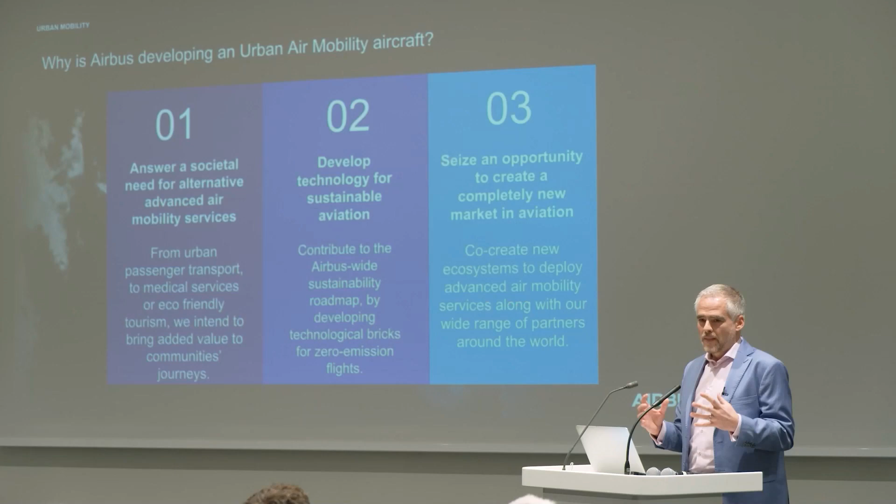There's also other missions that we can do, ranging from medical missions, not exactly a helicopter emergency medical mission, but transporting doctors, for example, to an accident site, between hospitals, elements like that. It can also be for eco-friendly tourism, so flying over specific monuments without creating too much pollution, visually and sound-wise.

So there's a lot of aspects where urban air mobility, or eVTOLs in general, will find their market. The second pillar, and that's very, very important especially for a company like Airbus, is that we are talking about electric flight. We are a precursor for everything related to local zero-emission flight. And we're developing the technologies necessary for that at a scale that's kind of a four-seater size, a scale that's relatively manageable in terms of technology.

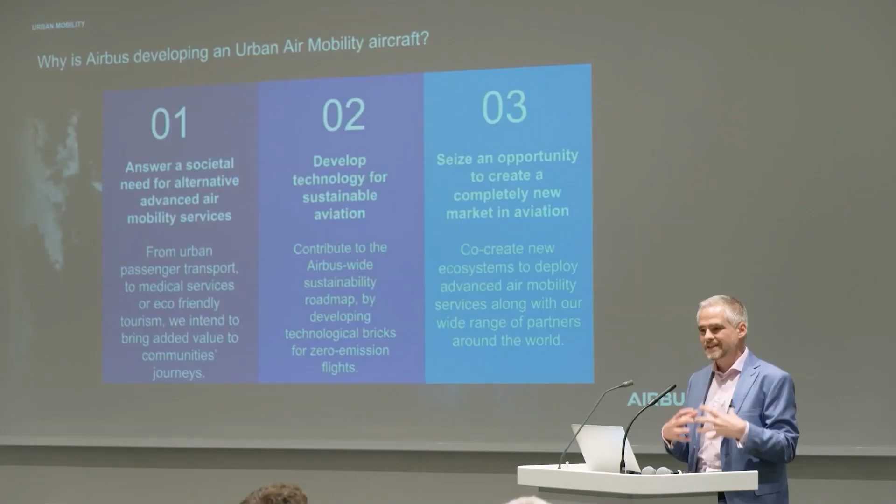It's about the order of magnitude of energy and power that you need here, like in a high performance electrical car. It's not yet the megawatts and so on that you will need in the future. So it's a good step towards electrical flight also at greater scale. And therefore, the investment that we are doing here is building not only the knowledge in the brains, but also the technology bricks for the product range of such a diverse company as Airbus.

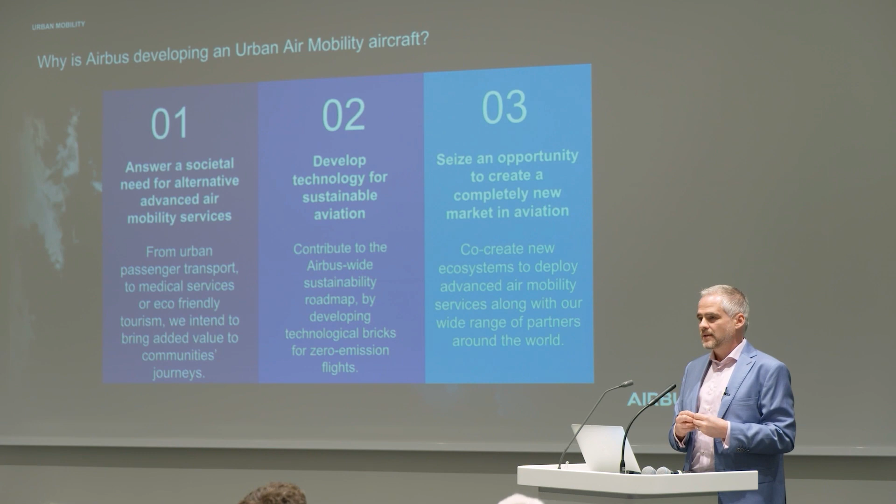And obviously, such a new means of transport is a business opportunity. So it's a way for us to develop a future business line that can capture this new market and therefore also contribute to the prosperity of the group in the long run. So many important elements that make us invest into urban air mobility.

Now let me start a bit on the technology side.

It's not really all about technology, but the question always comes up: why are we talking about urban air mobility now? Why not 30 years ago? Because 30 years ago helicopters existed, you could have taken off and landed vertically in cities and so on. So why now?

The main reason is the advancement of electrical propulsion technology, battery, energy storage, etc., that allow you now to build a vehicle that is relatively silent, economic, zero local emission, and that brings a solution that's economically viable and gets more competitive compared to ground transport.

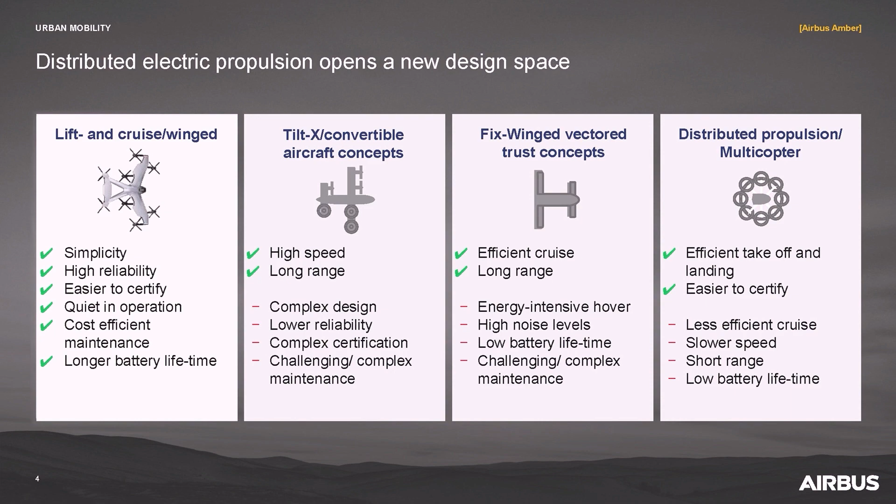Then you have different versions in between that allow you to adapt, go faster, go further, be simpler, be cheaper. Out of this whole new design space, the whole industry is now thinking about what's the right configuration, what's the right solution.

We just had it today: there's about 700 different concepts out there in the industry now, 700 different projects trying to explore this space.

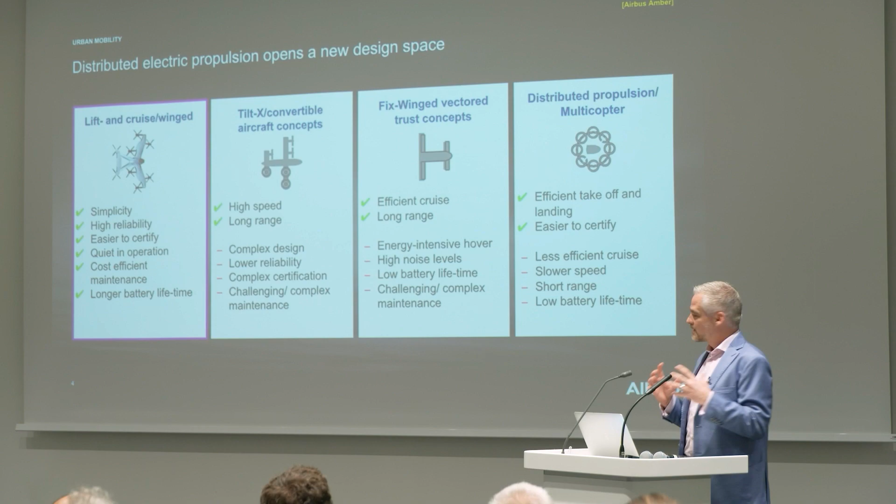I think it's just realistic to say that nobody really has the answer of what these eVTOLs will really look like, but we are all taking our knowledge, the industry and ourselves, and trying to project into the future with our knowledge and what will be the right eVTOL architecture. I'll come to that now.

We are not reaching yet the performance in terms of range and speed that we would expect, but you can see that we are mastering such a configuration already today.

What you have here is our very first generation of eVTOL, basically a kind of drone at the scale of a passenger transport system. It's been designed with the idea of starting with the simplest possible configuration, so multi-rotors. There's not much on it except for control, except the RPM control.

Then you have a cabin that is already designed for easy access, egress, great visibility, to a certain level of comfort already. It doesn't have a real cabin yet, but the shape and form is built so that it's in there. We've taken into account the safety aspects that we knew about in 2015-16 when we started this project. Since then, a lot of things have evolved, and our knowledge has evolved very strongly.

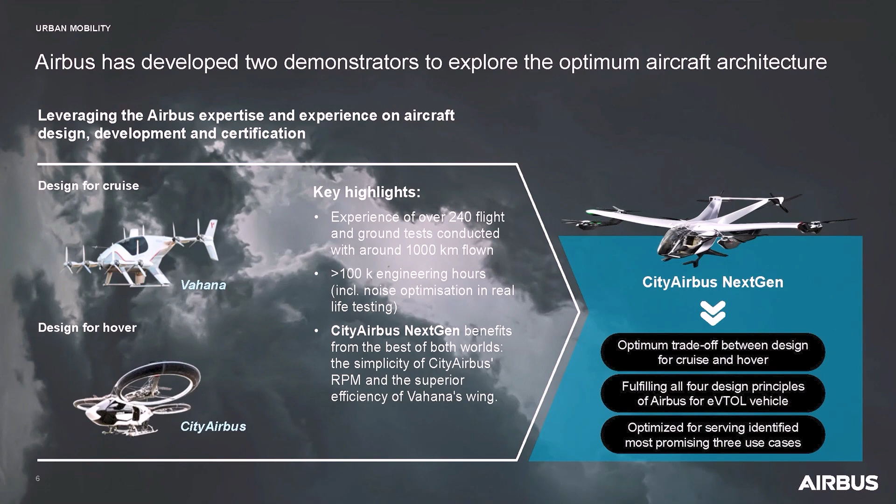So this one is a vehicle with dual tilt wing. It has also 8 propellers. The wings, or the aerodynamic configuration, change from vertical takeoff, tilting forward to horizontal flight, so it's very efficient in horizontal flight.

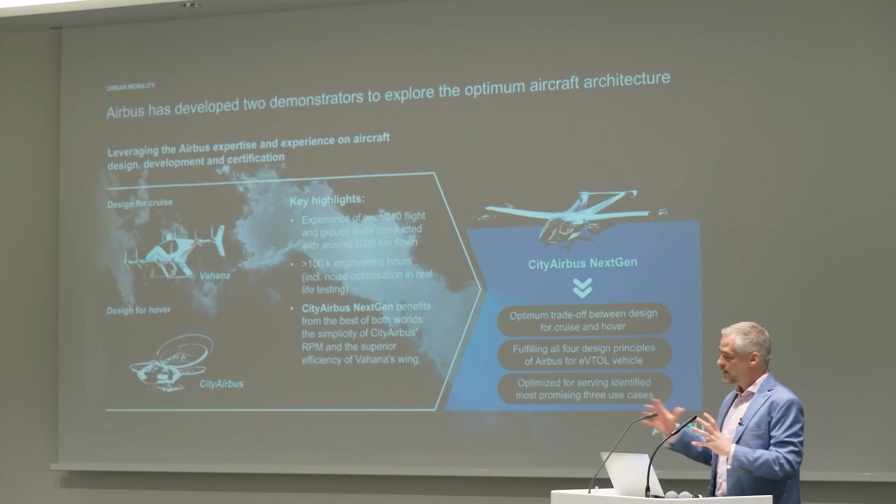But it requires, for example, variable pitch control of all the propellers, tilting mechanisms that are safety critical, so not easy to certify at the end. So a certain level of complexity with flight control, with control surfaces for forward flight and so on. It has been designed for an equivalent of about 1 passenger.

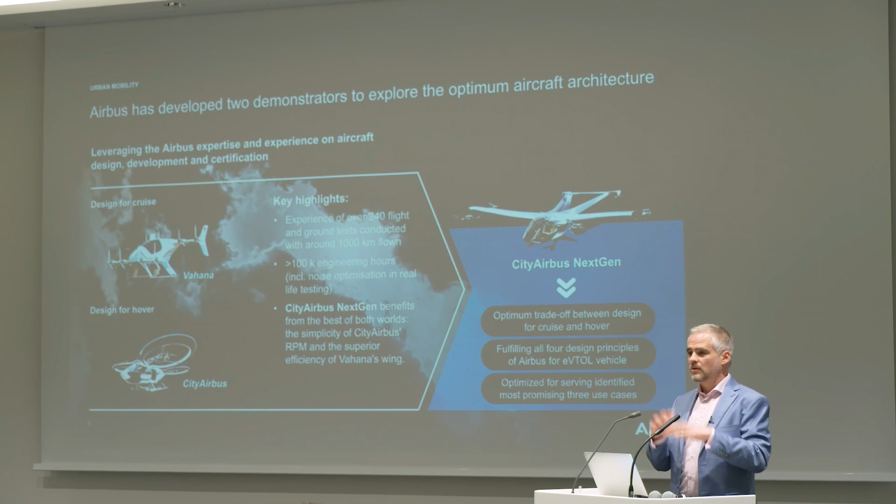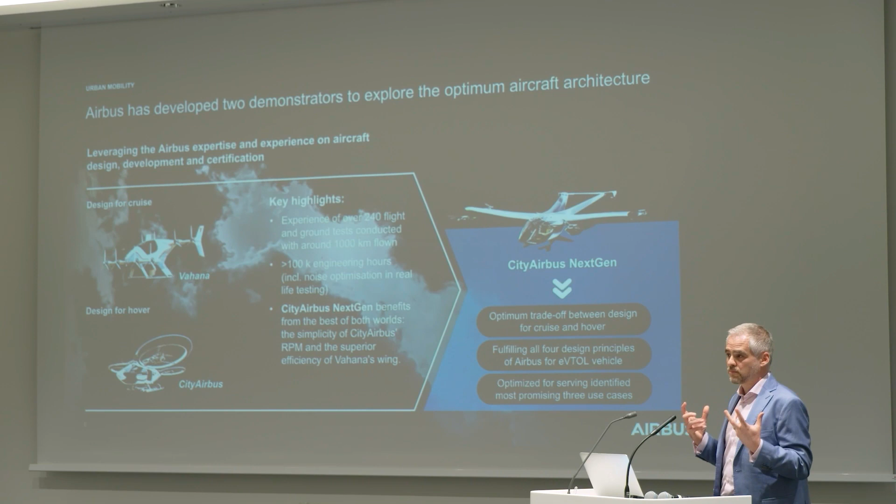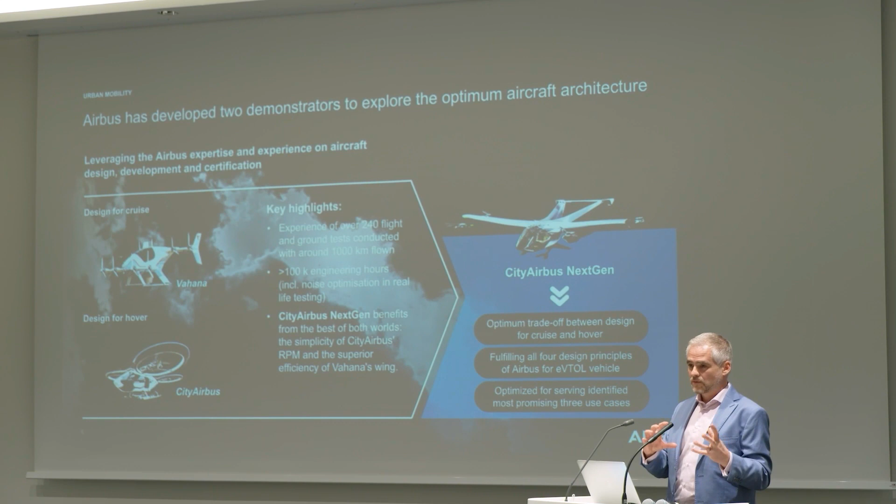I've seen this flight as well, and it flew at the end - it flew 50 kilometers at about 100 knots, and that's a pretty impressive mission. When you see and hear it, it was almost inaudible because in forward flight it was in this wing-borne configuration. So that experience gave us a lot of data on top of what I've described about the CityAirbus before.

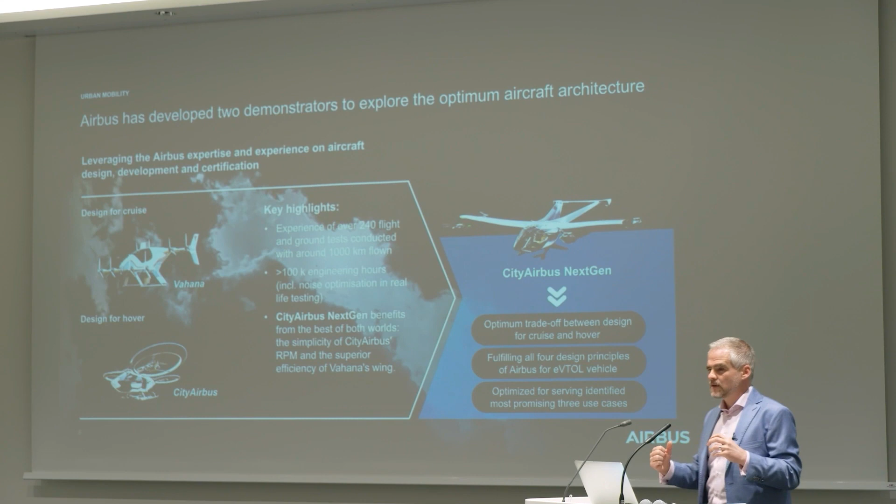And based on that data, we have designed a new generation. We call it, very creatively, CityAirbus NextGen, which you can see on the right. It's building on the bricks of having a wing.

It's still trying to minimize the complexity of the vehicle in terms of transition and so on. It still has no moving surfaces, and it's still only controlled by RPM control. Because of the shape or configuration of the propellers, it's a bit difficult to see on this black screen.

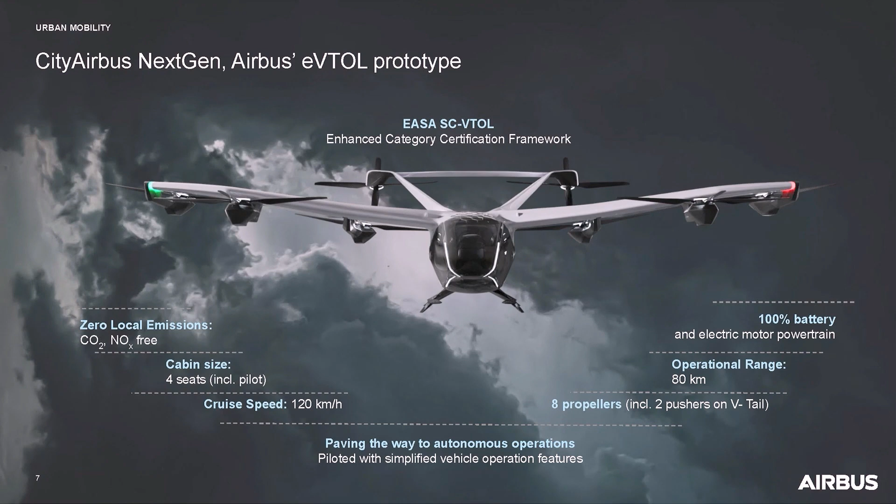But you have 6 lifting propellers on the, let me just take the next slide, you see it perhaps a bit better. You have 6 lifting propellers on the wing, and you have 2 lift-push propellers at the back, so it takes off like a multicopter, basically, like the first generation of CityAirbus.

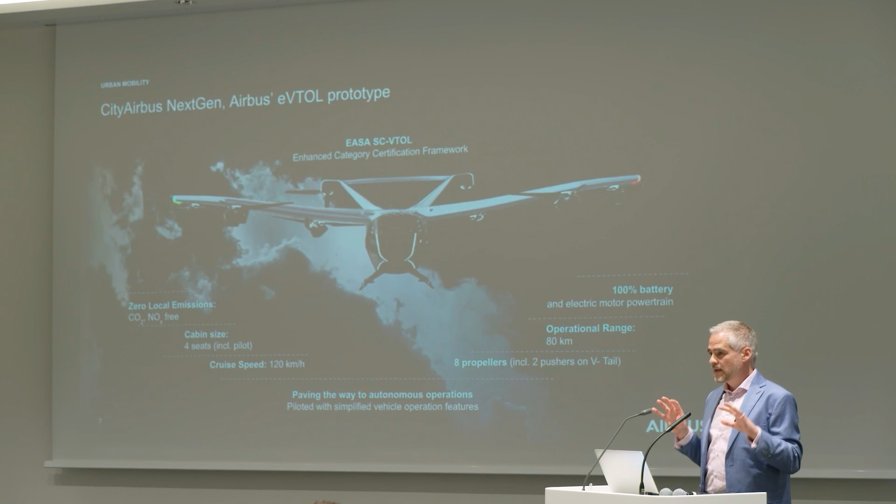And then it slightly tilts forward, and the 2 rotors at the tail will create forward thrust as well as a part of the lift, so it transitions into forward flight. Nothing changes, nothing tilts or moves. It's basically only the attitude of the aircraft moving into forward flight and getting back out of it again. With this architecture, we think we can build a real certifiable product. That's our target, our vision.

That is a 4-seater. At the beginning there will be 1 pilot plus 3 seats for passengers. That's the initial aim. It will fly about 120 kilometers an hour at a range of about 80 kilometers. It will be almost inaudible, especially in cruise flight.

When you're in an urban area with some ambient noise, you will probably not be able to hear it. At takeoff and landing, yes, it will create a bit more noise. That's normal - the sound emissions are more important there because we are really in the totally propeller or rotor-based lift part of the flight envelope. But still, with that configuration, we think we can stay below what we usually have in the industry.

The whole vehicle will be certified by EASA, along the EASA special condition VTOL, and I'll talk quite a lot about it in the second part of the presentation. This is kind of the European approach to it. FAA has rules as well, of course, for certifying this aircraft.

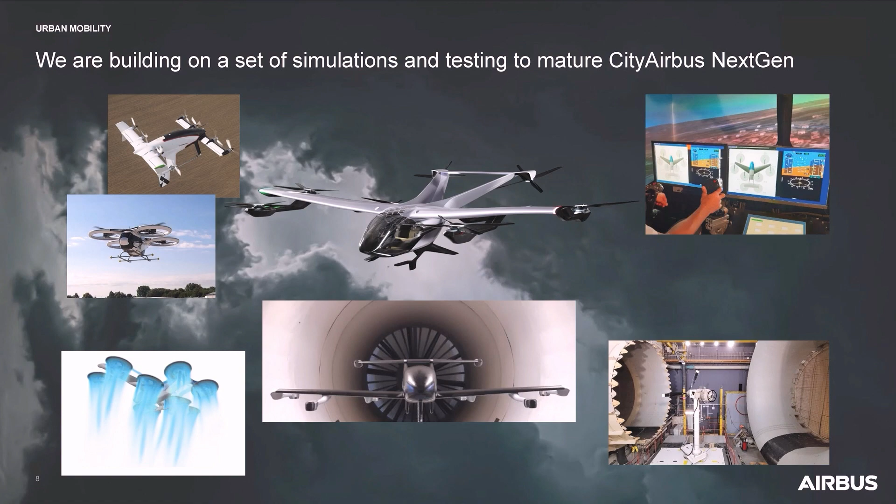Now, where are we standing at the moment? In order to come to this configuration, we've done quite a lot of studies and analyses. I've talked about the 2 vehicles that we have even flown, but there have also been a lot of simulations and calculations, especially in terms of aerodynamics and aeromechanics.

Last time I asked them, they had about 31 million CPU hours consumed for the aerodynamics calculation - that's already a while ago, so probably they are at 50 million now. An enormous amount of calculation, because the configuration in itself is relatively complex aerodynamically speaking.

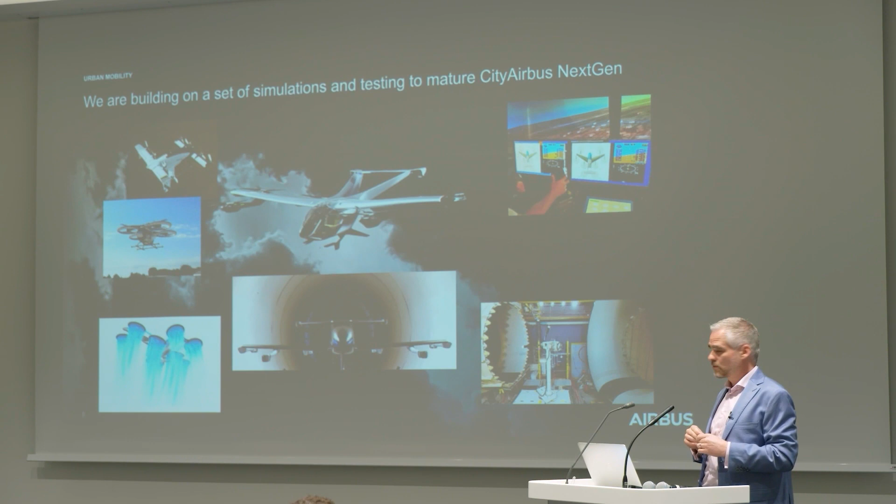You have the basic lifting surfaces, the wing, the fuselage, but then you have 8 propellers that change thrust dynamically, and you have to analyze all the interactions and couplings between the different areas of the flow field. So it's quite a lot of work to predict such aerodynamic behavior of the vehicle.

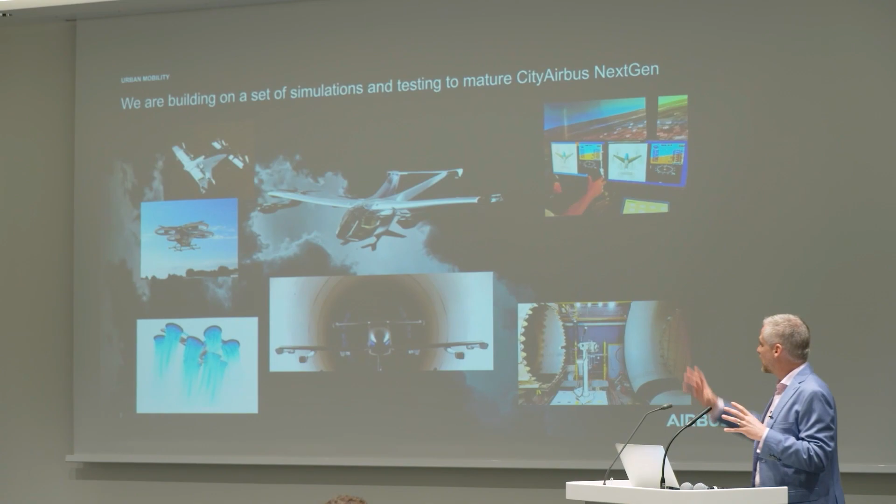That's why we have also done wind tunnel tests, of course, in a clean configuration without propellers, but also with propellers with motors on them, so that they are really turning and creating lift, to calculate and measure all the aeromechanic coefficients that we are having.

We have built a full-scale propeller that we've put in the wind tunnel and measured it also through the full future flight envelope, because that's not trivial either. You have kind of edgewise flow in this vehicle, so the propellers will stay horizontally during forward flight.

They will continue to turn. Some other propellers are at a slight angle that create the forward thrust and the lift. So this whole behavior of such a rotor has been analyzed, and on top of that, we have also measured the sound emission and optimized the design.

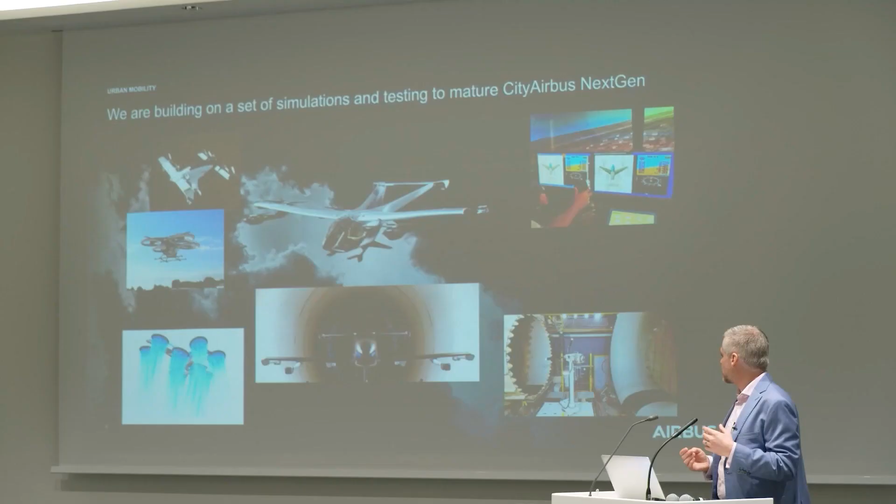Here you can see at the bottom right a 3-blade propeller. But there are other designs that we have checked - we had 9 propeller architectures that we measured and optimized in that sense. And that's very important. On the top right, and I'll go to that a little bit later in the talk, that's the flight control simulation.

So that's in our flight control center in Marignane, where you have a pilot already in the loop who is flying this vehicle and developing the man-machine interface. How will this flight be steered? You will not control the attitude of the vehicle, but you will control the trajectory. You tell the vehicle what it's supposed to do. You don't say nose down, bank angle, or something like that. So that's a very different concept in terms of controlling the vehicle. And of course, this is a fully electronic flight control system, so the flight control laws play a fundamental role in the stability of this vehicle.

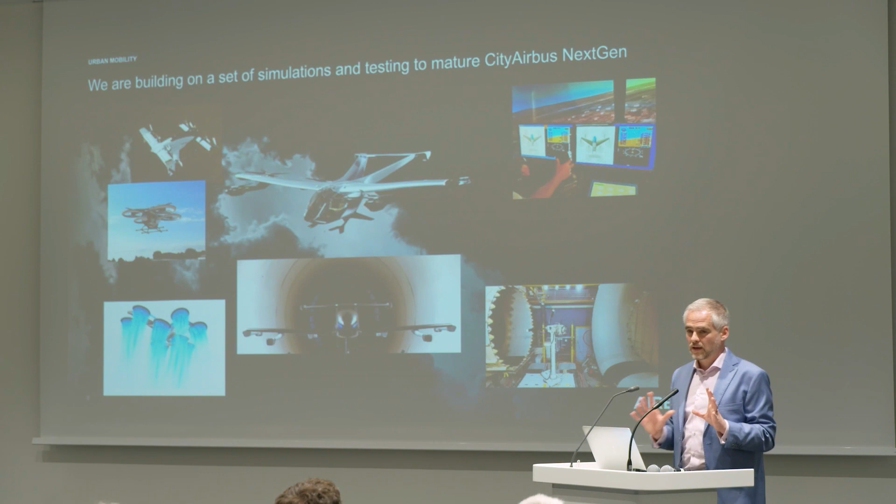So this is just to give a bit of an overview of the work that has flown into this design already. And this cannot be done alone, even for a big company. This is a broad approach with a lot of very strong partners.

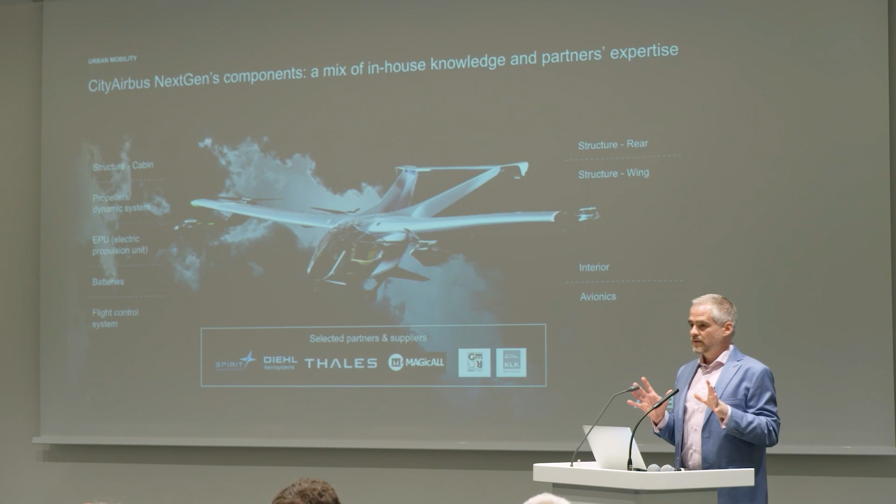So obviously there's everything around structure, and we source quite a lot of components from outside. We have Spirit in Belfast, for example, for the wing. They are specialized in wing design, let's say in a smaller scale than what you would have on an Airbus wing, but exactly what we need.

We use Thales and Diehl Aerosystems for the flight control system. It is a dissimilar, redundant flight control system with 2 different types of flight controllers, a primary one or 3 primary ones and a secondary one, that can ensure that we have dissimilarity and redundancy during the whole flight.

We are using the US company MagicAll for the motors. They have a strong competence in eVTOLs already. We used them already for the Vahana before, and on drones. So they are industrializing electrical motors for these kind of applications already today.

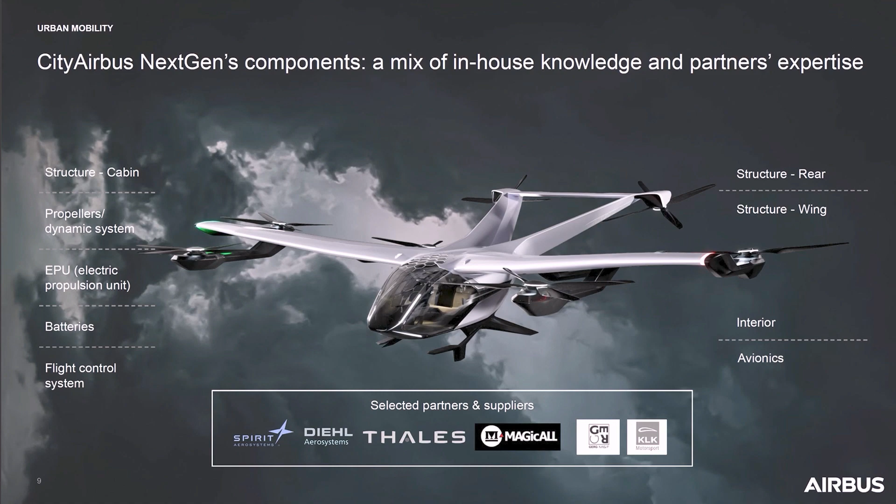We're using 2 smaller companies that are more like from the high-performance sports car part, that are doing, for example, the rear structure there. They are doing the design and the manufacturing with also principle, and that's interesting for us, that they get from the automotive industry, in this case from the Formula 1 racing industry. So we are trying to get different types of companies with different approaches and new ideas into our system, ranging from large, well-known companies to also smaller ones that can bring a different approach, so that we learn as much as we can out of this prototype phase that we are currently in.

So this vehicle will be flying in... so this vehicle, the components are currently in the detailed design phase. We're going through that process. The components will come next year. We'll assemble them and then test fly the vehicle, and take the amount of time it takes to fully understand this configuration and the technology of the different systems and the architecture in itself.

Perhaps one thing I missed to say is that we are using batteries. That's another fundamental part. We are building them in-house, that's why you don't see it on the slide. We're building them in our Airbus Defence and Space site in Toulouse, where they already did batteries for previous vehicles, and also for space applications, launches, satellites and things like that. And they have a strong capability of developing batteries.

And there will be other things that will need to come, like interiors, for example, and we need strong support for that, of course. So that's about where we're standing on the vehicle.

The vehicle itself is obviously one thing, but I wanted to show a second video, which is just about the test house, because we've done it a few days or weeks ago. We have inaugurated the test house, and there was supposed to be a video that doesn't show, but in principle, a lot of things need to happen in parallel: the technical development, the whole testing concept, to ensure that what we are doing here is really sound and safe.

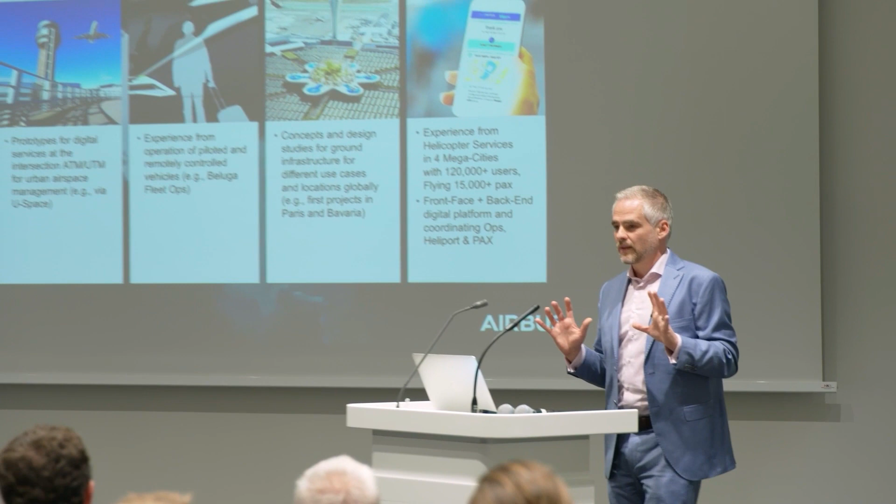And that brings me as well to the ecosystem view, and that's the second very important part. Yes, the technology is important. We are getting there now with the maturity of propulsion technology, etc. But such a vehicle will not be very effective if you do not integrate it into a transport system. So obviously, maintenance, operations, and so on, we know that from our industry.

We also know that you need infrastructure. And today you have large infrastructure, airports, basically for air transport that you need. But if we want to deliver a meaningful service, then we also need to have infrastructure there where the passenger wants to go, or close to the final destination of the passengers.

And that's not trivial, especially in European cities where you have very densely populated cities that have not much space for these kind of things. And it only makes sense if you fly to some place, if you then have to take a cab for another 20 minutes to get to your final destination, you basically lose the advantage that you get from flying in the first place. So infrastructure at strategic locations is key, and this infrastructure needs to be well utilized and profitable, so that it makes sense as an investment case. That's an important enabler for air mobility.

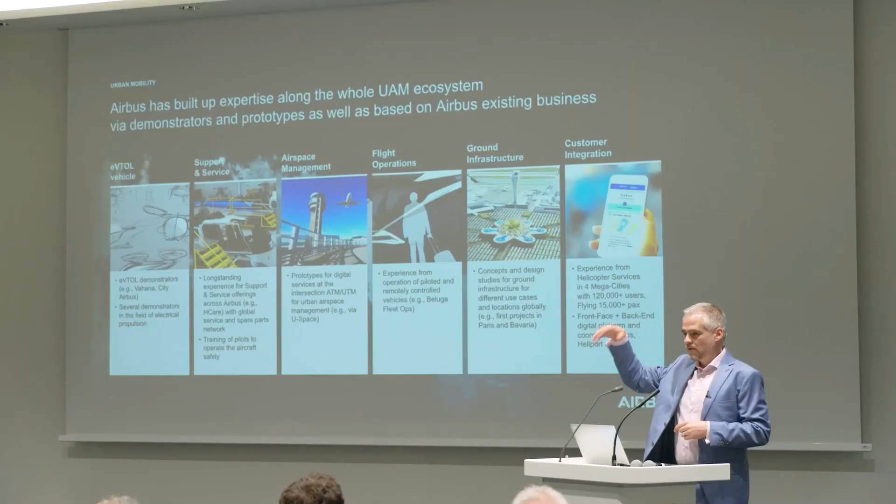Air traffic management is another very important point. You need to operate these vehicles ultimately in non-segregated airspace, together with all other participants in flight. You'll have helicopter missions, emergency medical service missions, drones, flying taxis around airports and over cities, and obviously the commercial flights. All these things need to work together. So the whole air traffic management part is fundamental to make this efficient and safe.

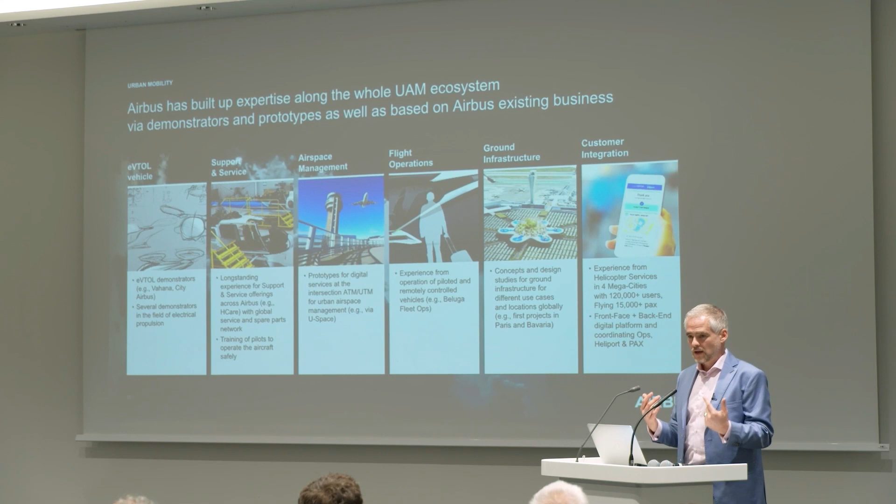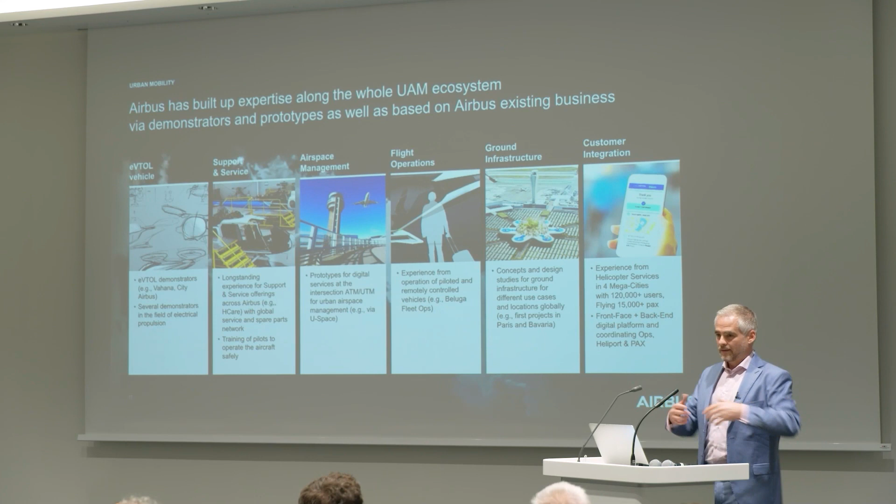And you need to deliver that service to a final customer. So you need to provide an integrated mobility experience that allows him to say, okay, whatever his constraints are - speed, budget, reliability, comfort, perhaps the pleasure of flying and seeing a city from above - you give him a tailored mission, a tailored solution comprised of a flying part, but perhaps also a ground transport part, an improved pickup at the airport, or a security clearance that makes it efficient. And you need to provide that to passengers in an optimized, connected, electronic way.

For that, I wanted to explain shortly that before the pandemic we actually operated a service called VOOM, using helicopters. We started operations in Sao Paulo, Brazil, but also in Mexico City, and eventually even in the San Francisco Bay Area. There you could book a flight with a button basically, with the app that we had. We had about 120,000 users registered on the website, and about 15,000 passengers that we transported. Out of that, we also got quite a lot of experience.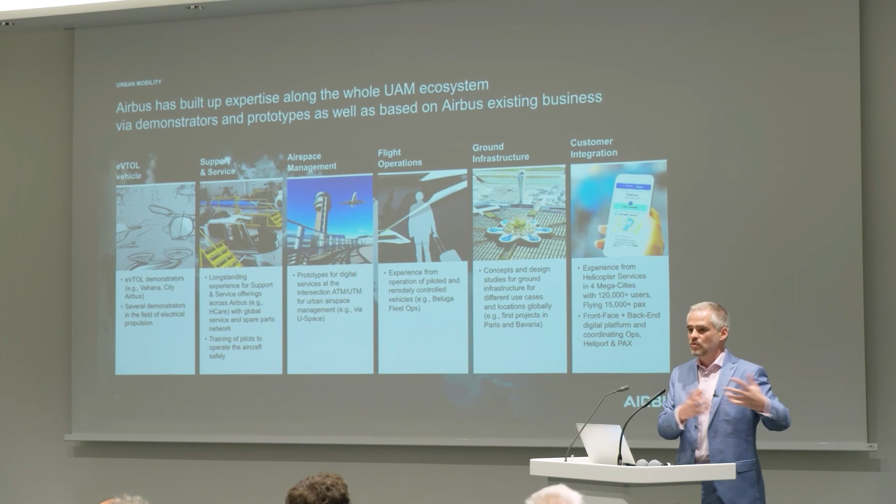We learned about luggage or expectations - what does somebody who wants to go to the airport take with him, what kind of profiles or travelers do we attract most, and things like that. That gives us quite a good view of what this market will most probably develop towards, which is important for the design and performance requirements you specify for such a vehicle. But again, all this is a projection now. This whole market needs to develop and materialize, and then we can talk again in 10 years and see how the predictions work and how things actually develop.

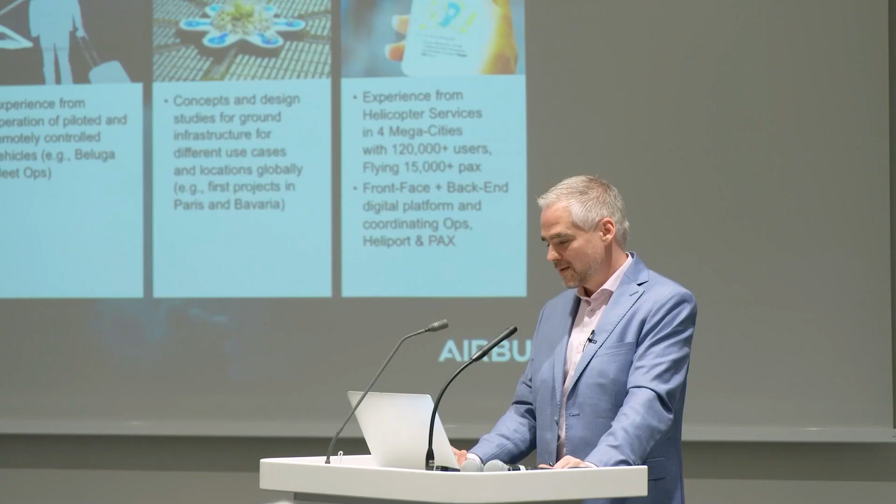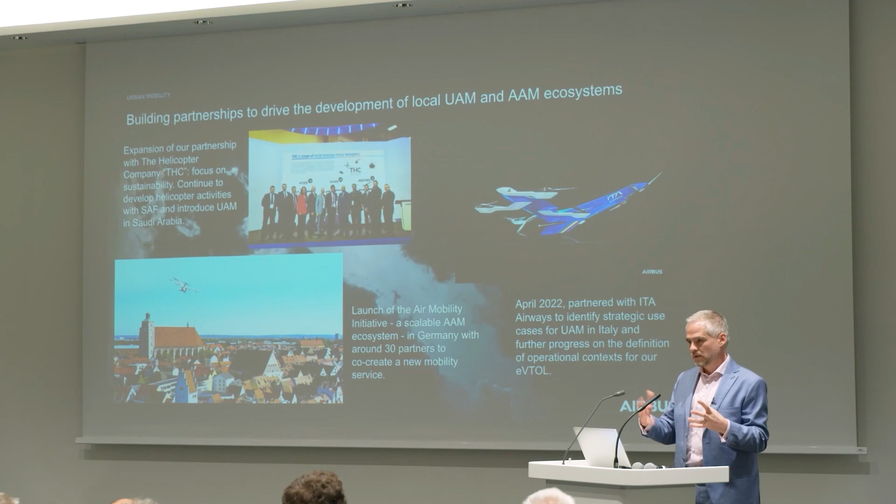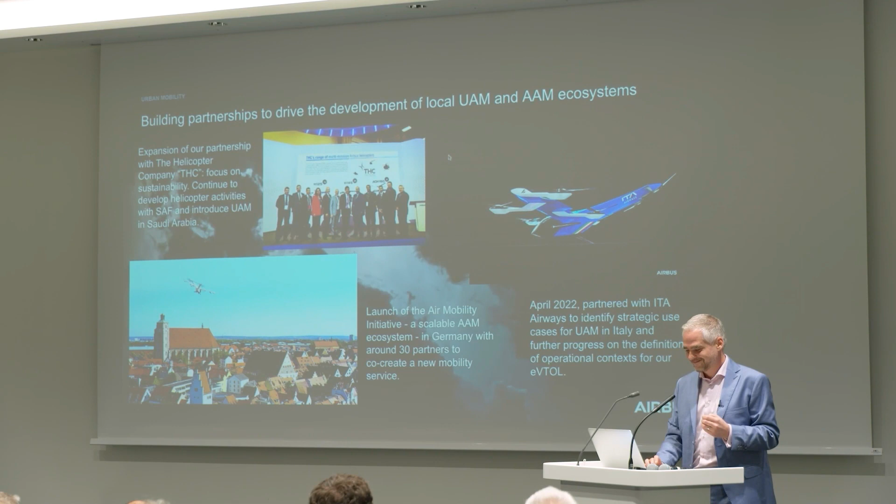And to not wait 10 years, what we are doing today is working with different partners throughout the industry on different aspects. I've taken three examples. One is a helicopter operator, THC, that wants to build a bridge between today's helicopter operations towards a greener, more sustainable operation, and then all the way to electrical flight. What we're doing with them now is developing sustainable aviation fuel operations for helicopters, reducing their emissions already today with the technology in the making, and then it will develop into eVTOL operations in the country. So we have one operator like that.

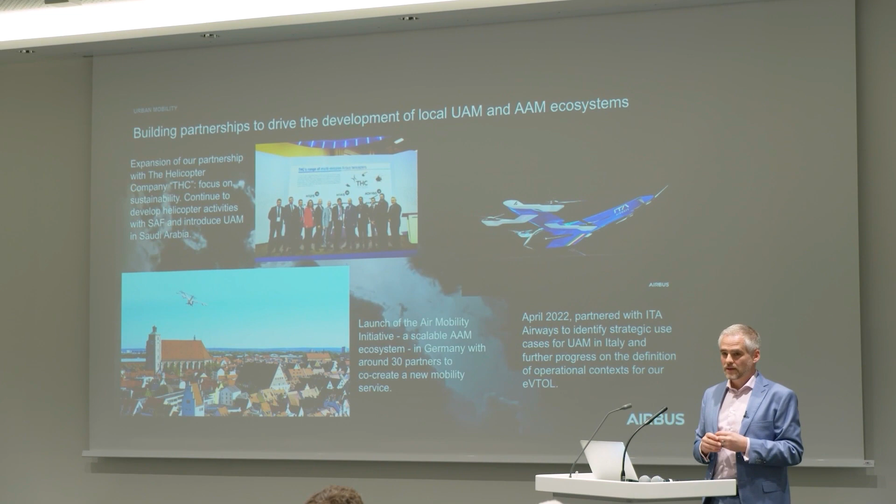We've also signed an agreement with ITA in Italy. This one is more about integrating our operations with airline operations, to see how the business case looks, how the passenger experience looks, and how these eVTOLs can add value to commercial airline operations. And on the bottom left, this is an initiative we're running in the Bavaria region, around Manching, Ingolstadt, Munich, with about 30 partners, where we're developing bricks and minimum viable products - the first proof of concepts, if you wish, for the air traffic management element of it.

We're doing this, for example, with Droniq, which is a subsidiary of Deutsche Telekom, and Deutsche Flugsicherung. Or infrastructure, where we're working with Munich airport, Deutsche Bahn, and a lot of local companies. That allows us to provide first bricks of this operational environment, where we can test that all this technology works, bring our eVTOLs, gain some experience, and use this knowledge to roll it out for future use cases wherever they will be.

So that's a bit of the overview around partnerships. Let me say it again: no single company will ever be able to develop this whole system that is needed here. That brings me to the second part of the talk, which will now focus on safety.

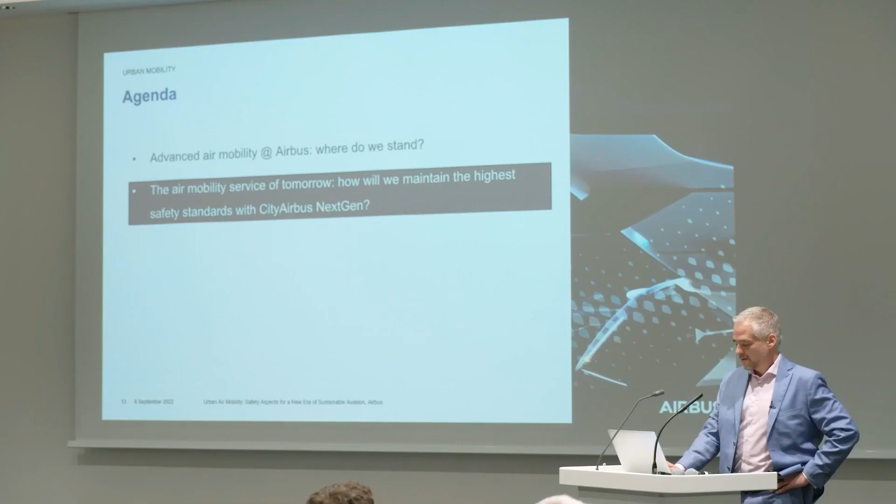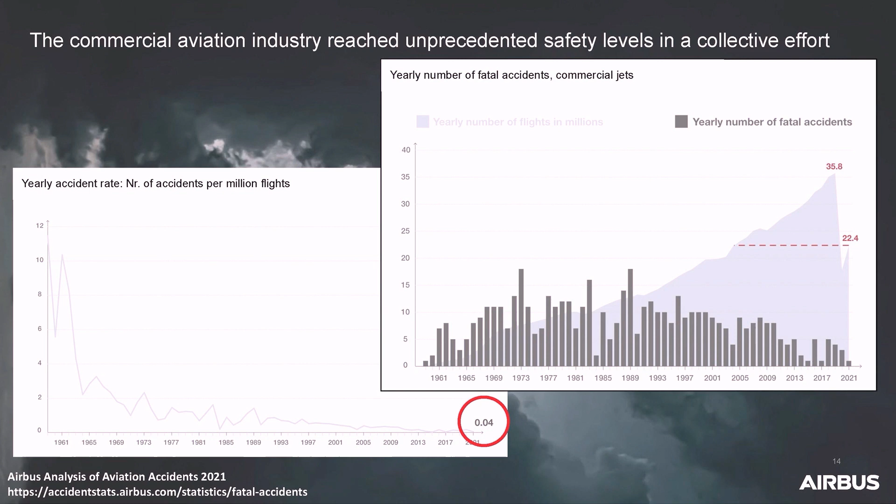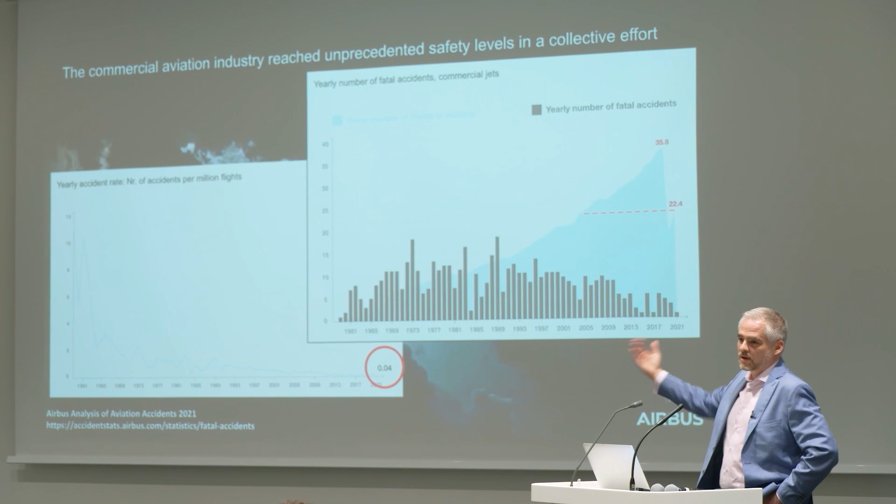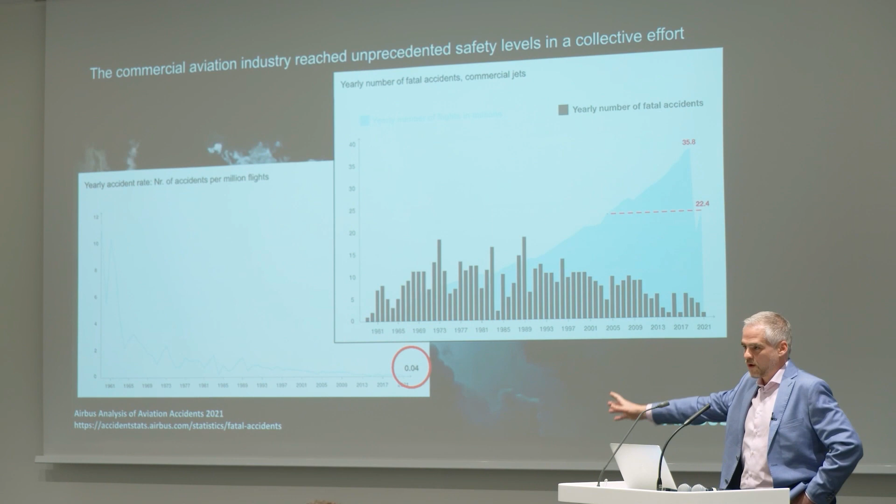That's because this was a collective effort. It's about a very strong safety culture, very strong technological progress, and industry, regulators and so on working together to make that happen. Now the expectation, the absolute must, is for us to have the safety levels of commercial aviation, because nobody will take a transatlantic flight and then get into an air taxi that's less safe. So we need to achieve what we achieved over 50 years in the commercial airplane industry from day one. That's the tough part of the story.

Now a little bit of technology, because this is a strong driver here. These are the different generations of commercial jets, starting at the top left. In the early days of jets, you had relatively manual flight controls, analogue instruments, etc., and not much support for the pilot, so you had 4 or 5 crew on board controlling the flight and ensuring its safety. At one point, flight control computers started to take some of the workload off the pilot — auto throttle management, technical systems, engines and so on. This was around the range of the A300 early days, where you still had flight engineers but about 3 flight crew.

Then you started to have more and more automated systems, a 2-man cockpit. From our side, Airbus, it would be the A310, A300-600, where you could actually reduce the crew to 2, with much more systems to support them — all the way to the fly-by-wire system that came at the end of the 80s on the A320, which even has functions like flight envelope protection that actually prevent accidents from happening.

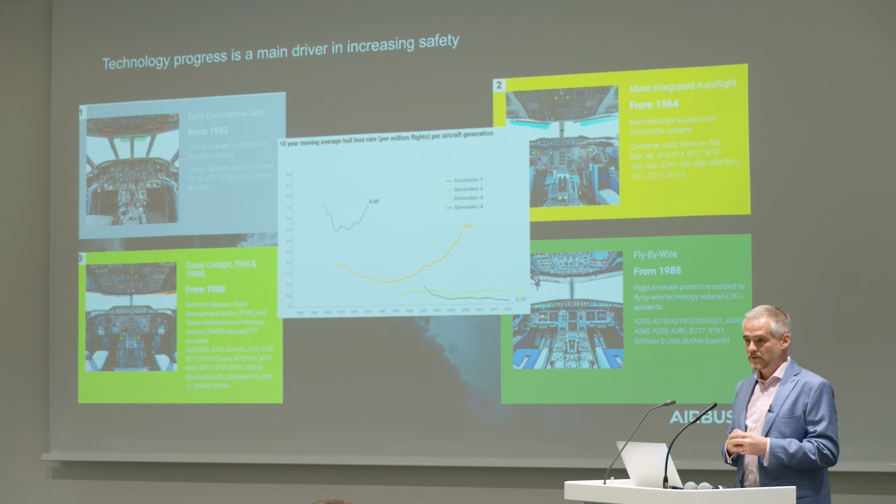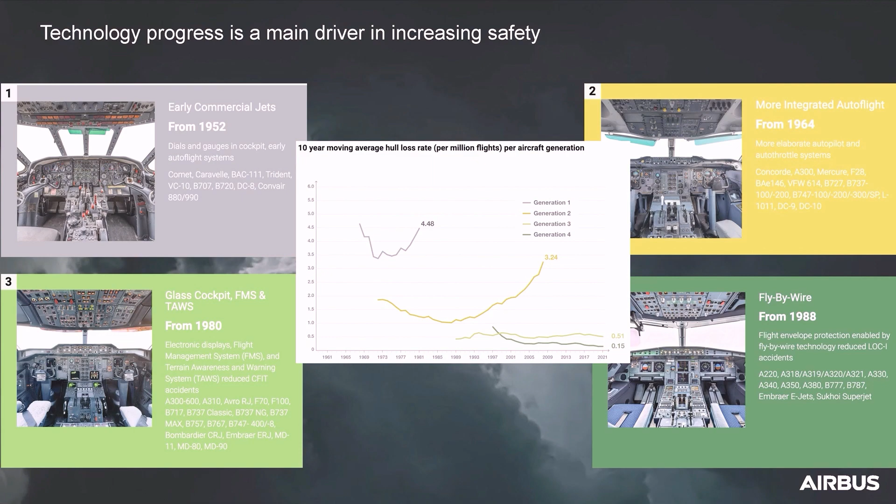When you look at the middle graph, you can see how this technological progress has actually improved safety levels. This is again the accident rate, hull losses, not only fatal accidents, but you can see how significantly this has improved the situation. Here again we're on a track and a challenge — the next generation will be better, and we need to be at this level or better with the technology we're bringing. That's not an easy one.

When you look at what that means, we're doing a bit of math for eVTOLs. I took a market projection from the public — in this case, Roland Berger numbers that projected how the eVTOL industry will develop. This doesn't mean we're saying this is the business case for urban air mobility, but it's a publicly accepted representation. It multiplies the number of eVTOLs flying by 10 roughly every 10 years, going from a few in 2025 to about 16,000 in 2040, and to about 160,000 in 2050.

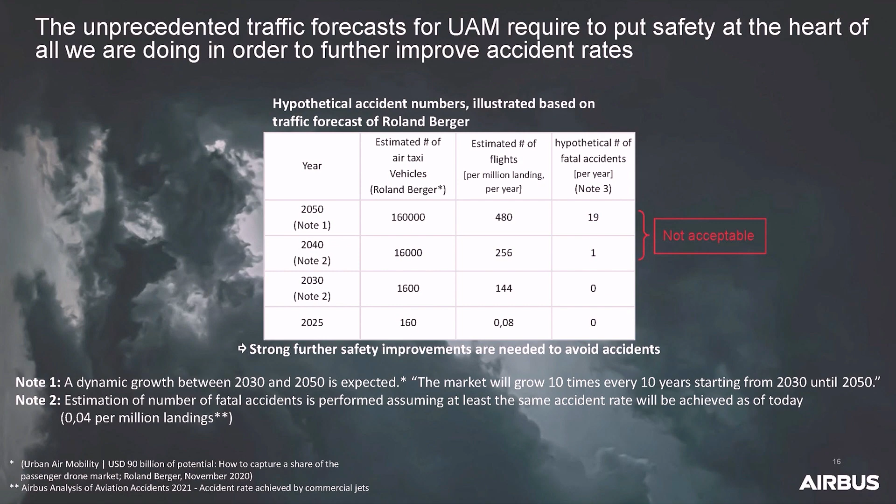Okay, that's far out - a tough projection, but still. When you do the simple math, and you would achieve the safety levels that commercial aviation achieves today after 50, 60 years of flying jets, you would actually start to generate, just by statistics, accidents in the future. So the culture or the focus on safety for such an industry is just for mathematical reasons already primordial.

So this is about what I wanted to say here. But let's look a bit deeper where the accidents come from. This is again large commercial jets - here you have the primary cause of the accident. Generally an accident is a concatenation of different unfortunate events. It's rarely just one single event or failure, and there's generally a primary cause and some secondary ones.

What you can see here, let's start from the top right with the smaller ones: you have air traffic management, weather, operations - things that are difficult to classify. Then the larger block, the orange one, is around technical failure of the aircraft - this is what you work on in the design and certification of the aircraft. And then there's 58% that are related to crew errors, human factors, and things like that.

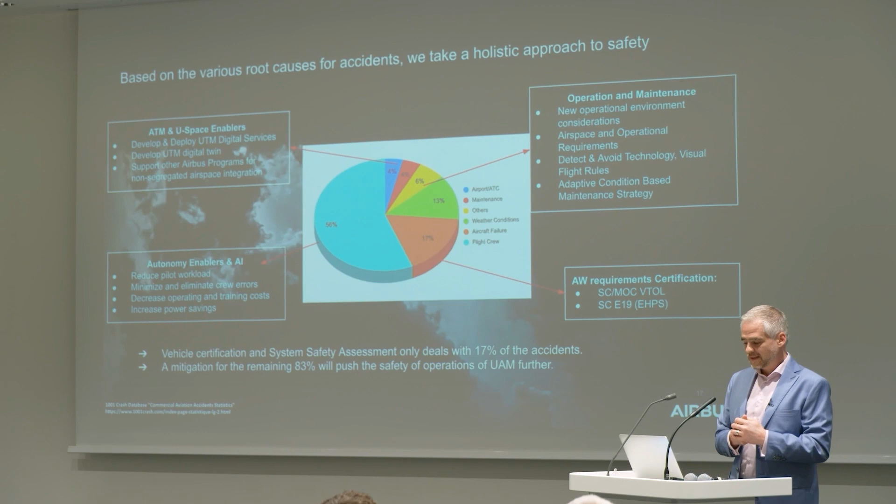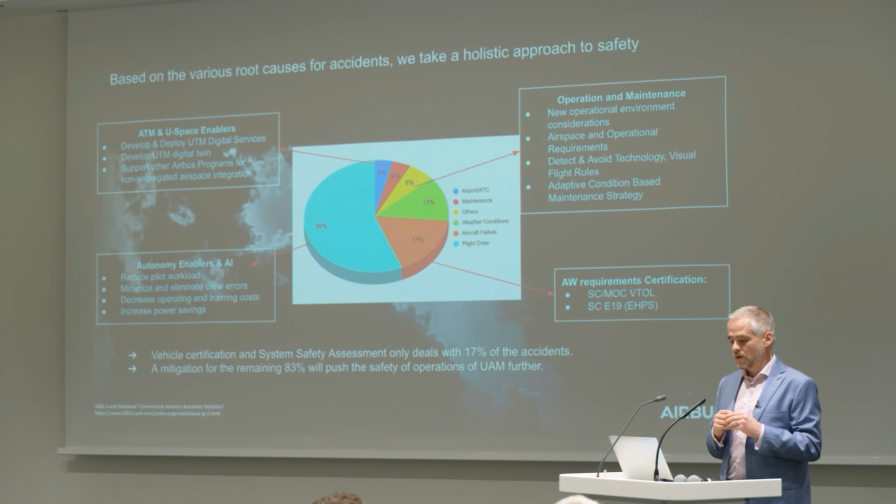So what we are doing here now is attacking the different areas from different angles. Let me start on the top left - there's a lot around air traffic management and U-space, which is the airspace, the lower airspace over cities, where drones and flying taxis evolve. There's a European EASA-driven initiative of installing such a U-space so that drone operations, air taxi operations and so on can happen safely and efficiently. We are actively developing, with one of our centers in Europe and in the US, specific services for managing the aircraft - what you need to track, follow, and authorize the vehicles to fly.

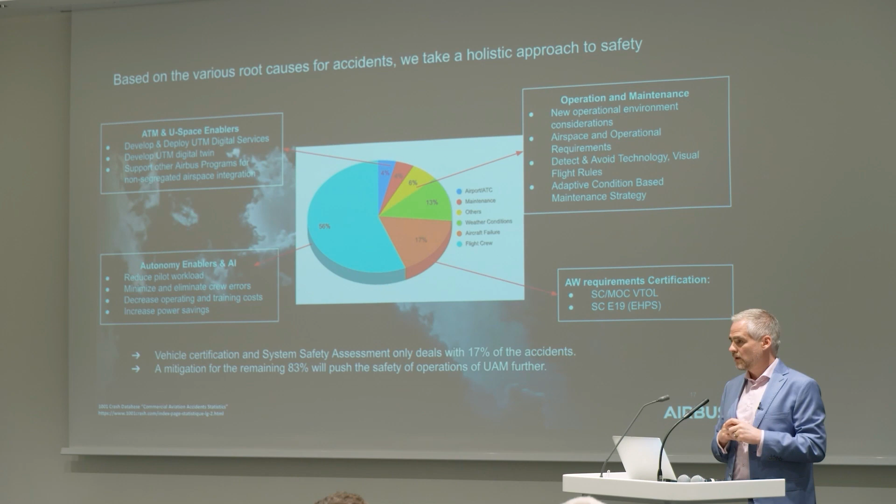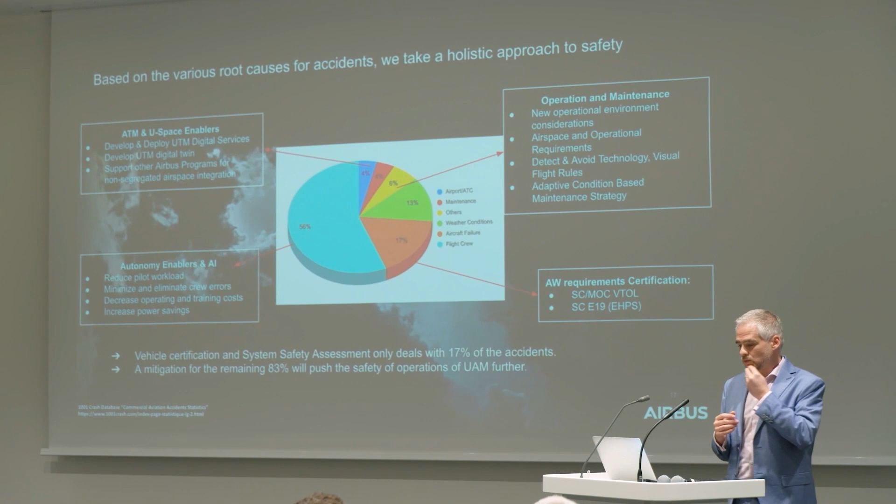We also have what we call a digital twin of the airspace - a simulation of what the airspace looks like, so you can test what different types of regulatory or procedural directions have as effect on safety and efficiency of the airspace, and therefore the whole operations. We are using that entity as well to provide insights to Airbus at a larger scale of how these vehicles will operate together in the future, especially in a non-segregated part of the airspace. That's a big chunk of work we are doing in our ATM/UTM group.

We are working quite a lot on autonomy as well, on the bottom left. Autonomy mainly deals with human factors of piloting and so on. What we are trying to do is provide more pilot support functions of all kinds - situational awareness and reducing the workload of pilots - always with the objective to minimize all kinds of potential errors. But we also need a large number of pilots, so also to reduce operating or pilot costs, make it easier and simpler to fly the vehicles. You can also better optimize the trajectory if you automate it better, save energy with that, things like that. So pilot workload is very, very important in the safety of the flight operations itself.

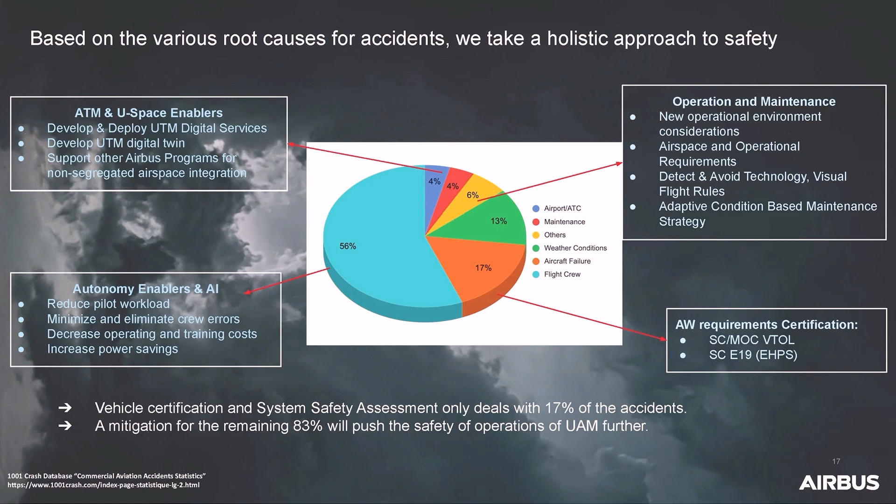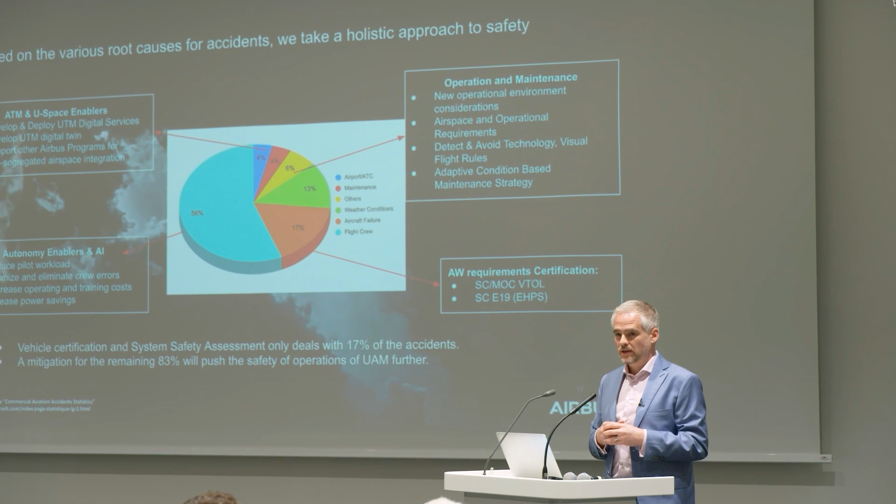Then on the bottom right, you see everything related to vehicle safety, and I'll dive into that a bit further - this is the famous special condition VTOL that EASA has issued. And the top right is everything related to operations. One important element is a more condition-based maintenance concept, for example - so you don't have fixed intervals, but you do your maintenance according to the needs and evolution and usage of the vehicle, and different operational procedures that you use to improve the flight conditions. So again, with the certification and safety part, you only touch about 17% on the bottom right.

But still, this is fundamental in order to make safe operations possible. Now, that's the tough part, and the kind of adventure in urban air mobility. So what we are doing here, we are developing regulations and technology at the same time, and business models on top of that, and infrastructure and so on. Because all of that needs to converge here, represented at the top right. And once everything is there, the regulatory environment and the technology, only then we can really start the operations as it should be.

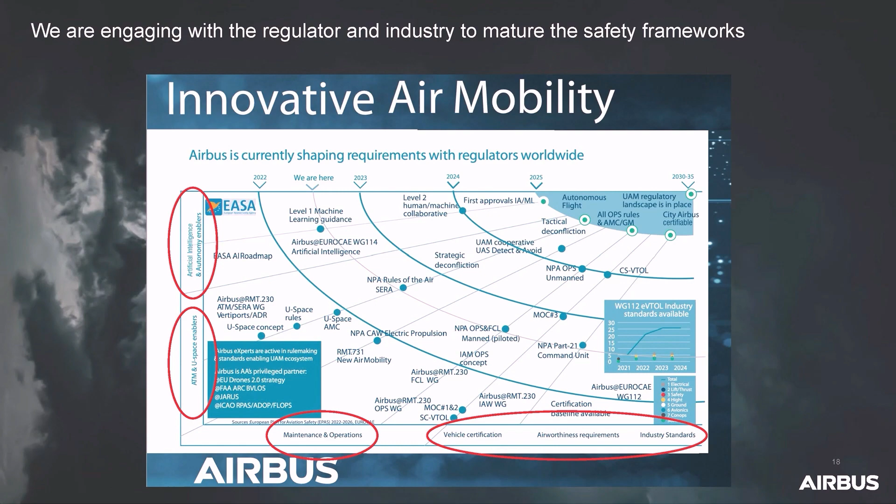There's basically four main aspects here, similar to what I said before. You see it on the top left: everything related to supporting the pilot with artificial intelligence or reducing workload, autonomy it's called here. Everything related to U-Space. Then everything that's more the operations and maintenance concepts. And on the bottom right, everything related to the vehicle itself. All these elements have different working streams together with the regulatory bodies, the standardization bodies, and industry working groups in order to come to this top right.

If you take just the example of the regulations, the certification regulations, the SC-VTOL, you'll see that this is this part here. The EASA already issued in 2018 the first regulatory framework for comments, which is fantastic because that enables the industry to have a frame and a target that they are working towards. So it was published in 2018 for comments, and then it became the Special Condition VTOL. With that, they also issued shortly later the applicable means of compliance, at least the first two batches, the first two important ones. That means the MOCs are the way you develop and qualify, you demonstrate that you achieve the certification requirements.

So the means of compliance help you in doing that, because this is something that has already been tested, proven, approved in how you design your vehicle. And you can see now we are roughly at batch 3, the third batch of applicable means of compliance. There's a lot about batteries, for example, and operating electrical flight in this part, which is actually a tough one as well. Now you can look at all the different areas here, we'll not do that now, but just to show you there's a lot of moving parts in this, from battery technology to regulations to the future market needs. And that makes it, on one side, very interesting and exciting, but on the other side, a bit uncertain as well.

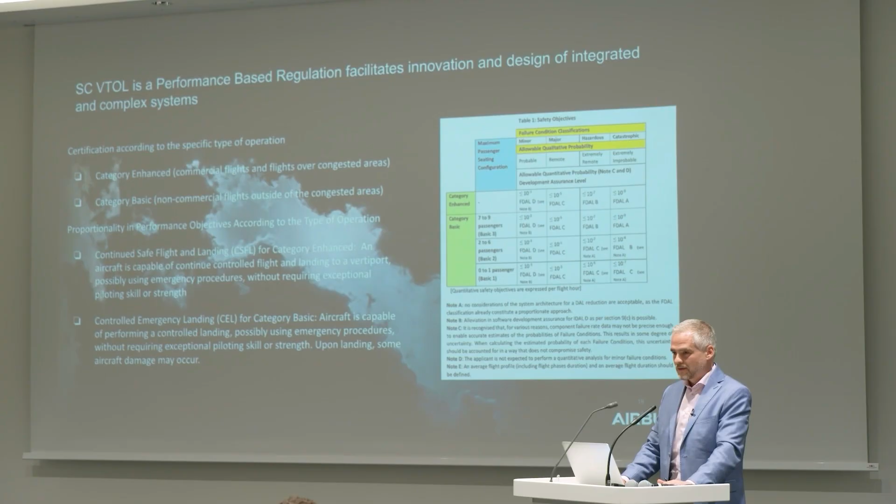So certification requirements, because this is kind of the top subject. SC-VTOL is a performance-based regulation, so it's not prescriptive as it was before on the certification standards that we were using, from let's say CS-27/29 for helicopters, for example. So it's performance-based, and it depends what kind of safety standards you need to reach, depends on the mission and the performance that you get.

So let's perhaps not go too much into detail, but there are basically two categories. There's a basic category, which is for non-commercial flights over non-congested, not densely populated areas. And there's the enhanced category, which is actually for commercial operations and/or over densely populated areas. So flying taxi, by definition, urban, densely populated, commercial operations, so it's the enhanced category.

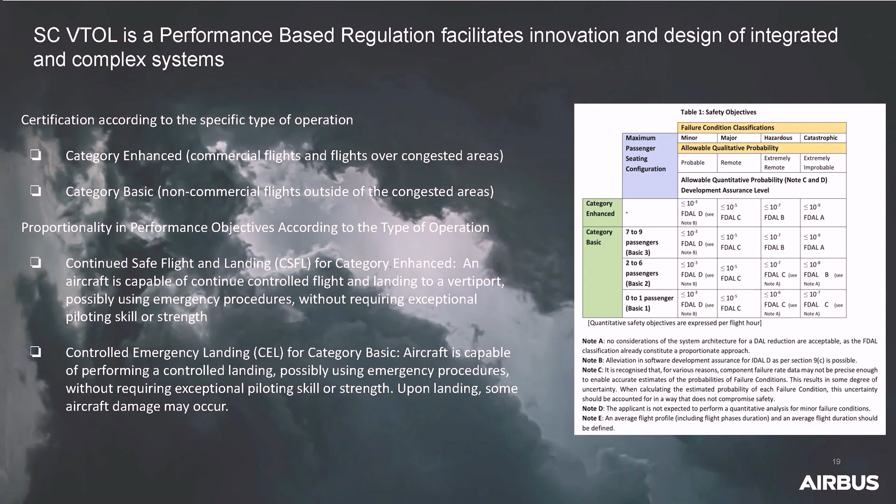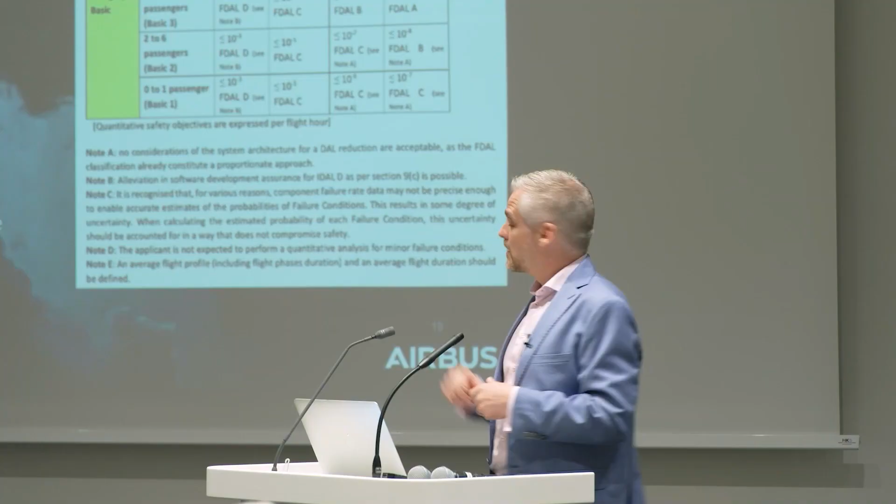The major ones are okay, increasing significantly the pilot workload, but still manageable. Then the hazardous ones, now it's getting critical, and the catastrophic ones mean actually that you do not reach your mission goal. In this case, it's already considered a critical event if you do not reach your final destination, your mission destination that you had planned before. The target here is 10 to the minus 9, so catastrophic failures per flight hour. This is basically the safety level that you have on a large commercial airplane. That means we, with our little eVTOL of 2-something tons, need to reach the same safety level as an Airbus A350 out there.

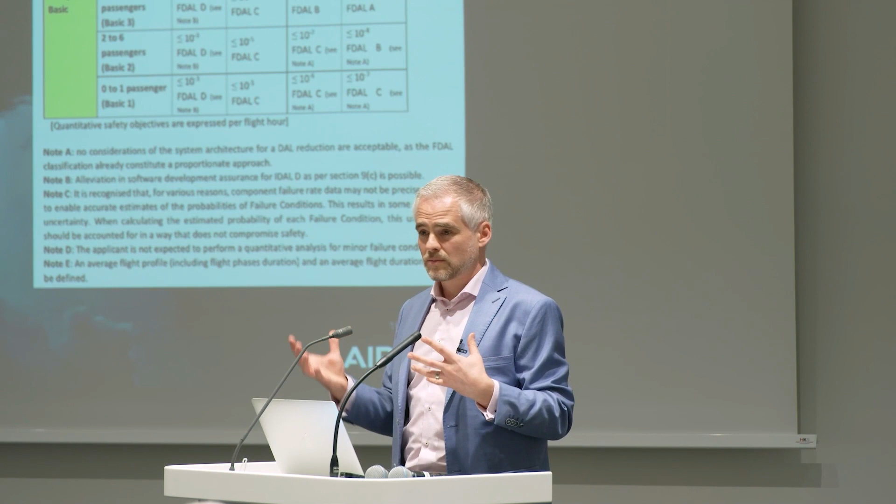And in particular, we are fly-by-wire aircraft, so we have systems like that. We have battery energy storage and all that kind of things, and we need to reach that level. That's a pretty tough one.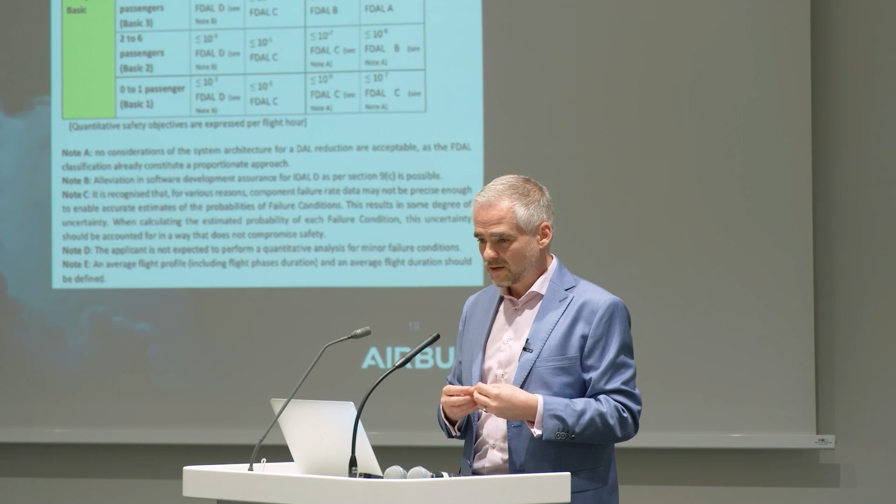Another one that we get in the enhanced category is the continued safe flight and landing. Obviously, we cannot emergency land in a densely populated area. That's not acceptable. So it prescribes that in every failure scenario, if you have a single failure, you need to be able to complete your mission or complete a flight and land safely. This is different from helicopter operations. If you take the basic category, you are allowed to do a controlled emergency landing. That's acceptable, but not for commercial operations in this enhanced category. So a tough one for us to crack.

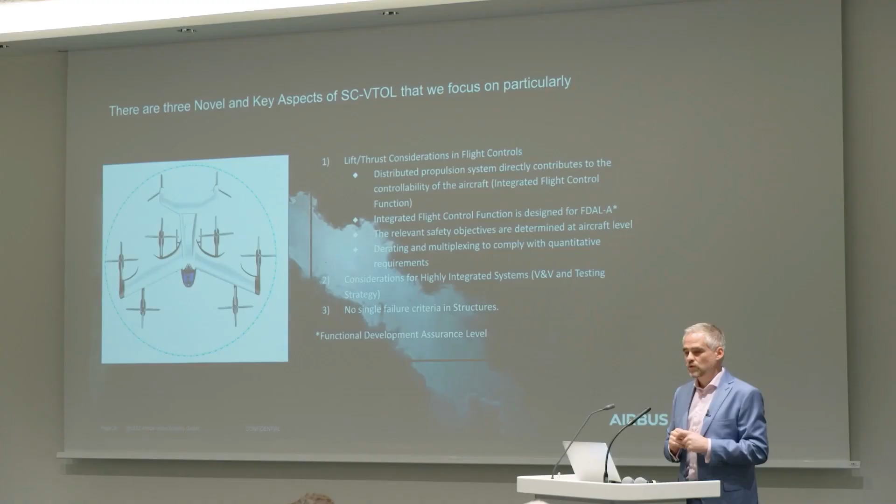Now, let me talk about 3 key and novel aspects that we have in there. The first one is around the lift and thrust units, the propellers and motors, that are now an integral part of the flight control system. You cannot segregate as you have it on more traditional airplanes, where you have a flight control system with surfaces and so on, and a separate thrust management system for the motor. It's integrated because the two functions are now basically the same. So you have only one integrated system in that sense.

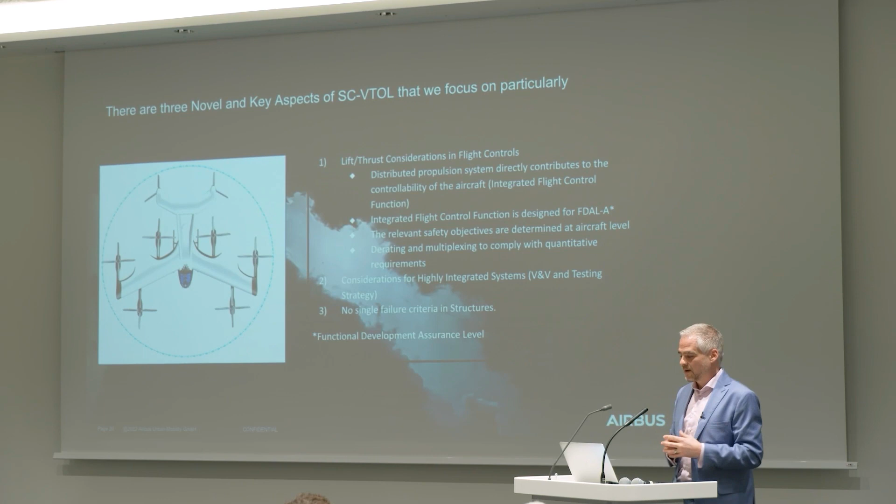And obviously the whole flight control system, motor controls and so on, needs to be according to these functional DAL levels, shown on the first slide. This is the development assurance level - the rigor, the process that you have to follow in order to qualify your system, your function, your software. It prescribes how you track and monitor your software and how you ensure that it's error-free. That's the design or development assurance level. Everything needs to be developed according to the highest DAL level, meaning like a critical system on a large commercial airplane.

And you have to actually see the safety objectives at aircraft level. You cannot only say, okay, my motors or whatever are at this level of safety - no, you need to really look at it at an aircraft level. And what you do as well is you derate to some extent, meaning you build systems that have some margin in it. A flight control computer that has more computational power than is really needed, or a bit more bandwidth in these areas, so that you have a bit of margin in there in the system, should the logic, the software, the algorithms evolve at one point in time, but also to ensure that you do not have an overload of the critical systems. You do a bit more redundancy, and you quantify how these safety measures are looking like.

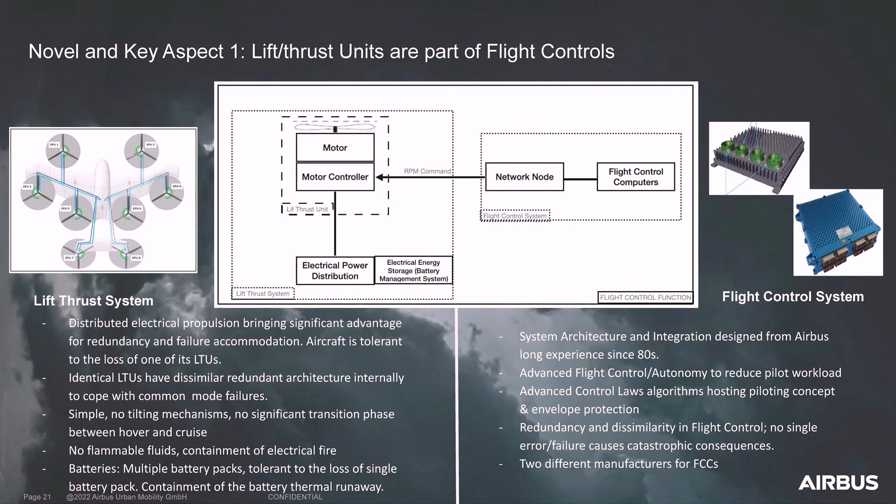So starting with the first one, the lift thrust unit. Here's a simple scheme of how this interaction looks like with the flight control computers on the right, and the electrical propulsion system on the left. We have a distributed electrical propulsion system, which is obviously very favorable in terms of redundancy. We have 8 propellers in this case, with a certain architecture for the batteries, multiple batteries, and power distribution. We have identical motors, or lift units, we call them LTUs - lift thrust unit - basically the propeller and the motors that provide the lift and the thrust.

They are basically the same, and what you have to do in this case, the LTUs in themselves, the controller and the architecture of it, needs to have a redundant architecture already inside these components. This is important because you do not want to have common mode failures. If you have the same design everywhere and there's a mistake, and you don't have any redundancy or dissimilarity in there, you will have troubles on multiple systems that you cannot deal with. In our case, there are no tilting mechanisms involved, so the configuration itself stays the same. That makes it a bit simpler.

Perhaps one word about the batteries. Yeah, there are multiple battery packs in there, and obviously we are tolerant to a loss of a battery pack. There's a lot of challenges with the battery part in terms of storing such a big quantity of energy - we're talking about roughly 100 kilowatt hours, the same as a high-performance car - and ensuring that thermal runaway and crash elements are well mastered. So that's a tough one.

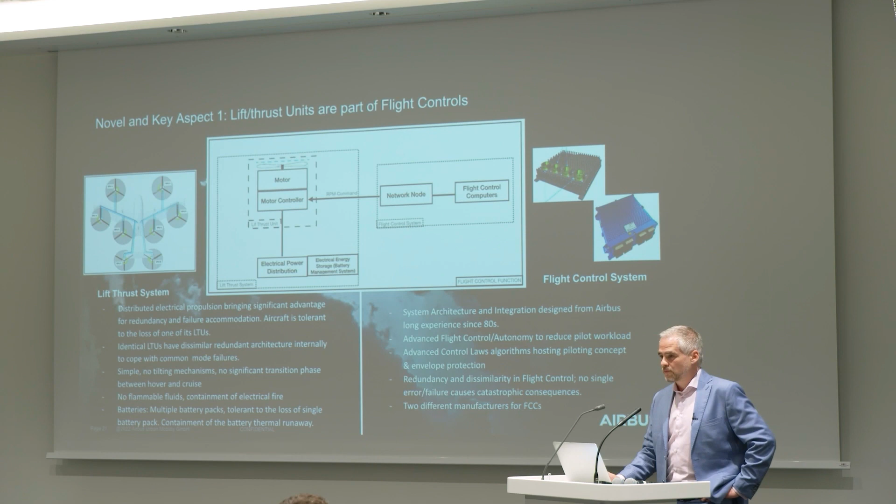The same applies here, like to a commercial airplane. We have full fly-by-wire, flight envelope protection, and obviously assistance to the pilot to the right level. Again, dissimilar and redundant - we've pushed it that far that we even have 2 suppliers of flight control computers, whereas we are doing in-house the architecture of the flight control system, the software, and the algorithms. So this is kind of to deal with this first element of integrated lift, thrust, and controls - flight controls.

The second one, again to this V&V process - I guess the basic principle is the same as in the aerospace industry in general. You have requirements, performance and safety requirements. You manage the requirements at the aircraft level. You break them down to system, subsystem, component level, all the way to manufacturing, and then you develop your elements, your components, your parts. You build them, and then you assemble them part by part, level by level, from subsystems to systems to the aircraft, and each time you test it.

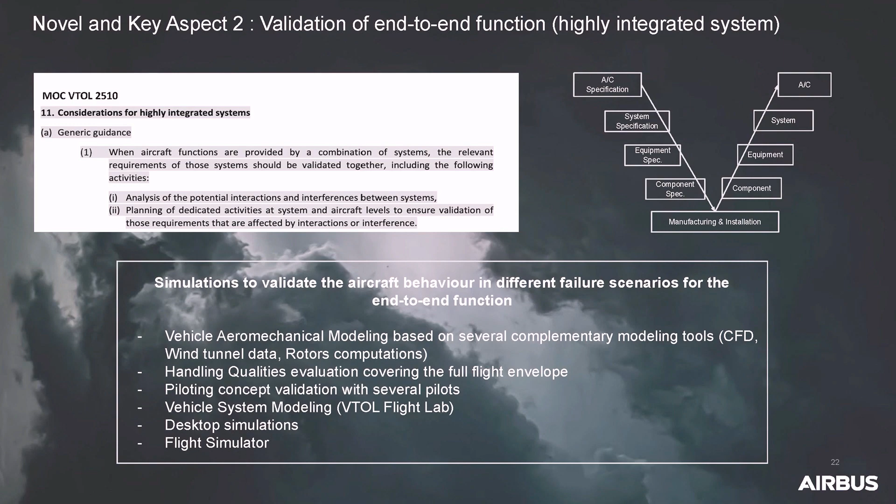And that's the part I wanted to say about the test house. We are investing heavily into that, so that we have a facility where we can do the tests throughout the V&V cycle, all the way to the full aircraft sitting in a hangar with the propellers turning, generating thrust. We can do that in stable conditions before we send it out to really fly it. The component tests are already running as of today - we've received the first components for the ground tests, or bench tests. We are testing motors, flight controls, and so on already. We get step by step over this year and next year to have everything together in the test house.

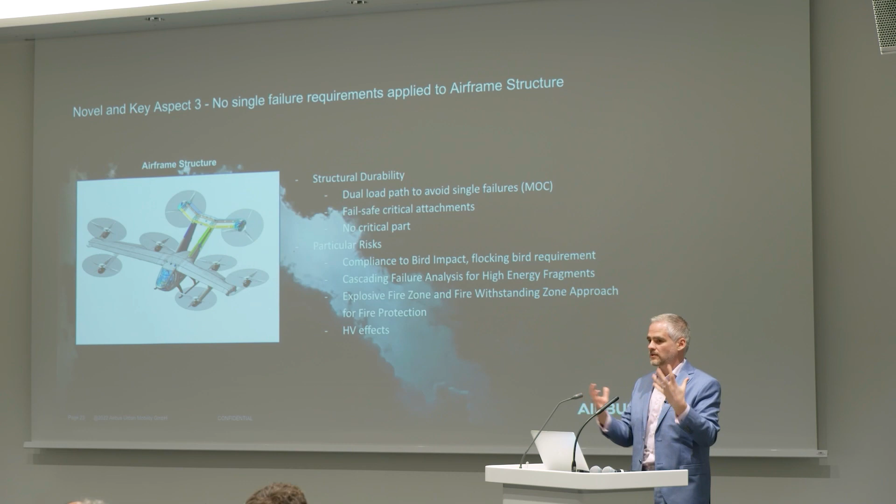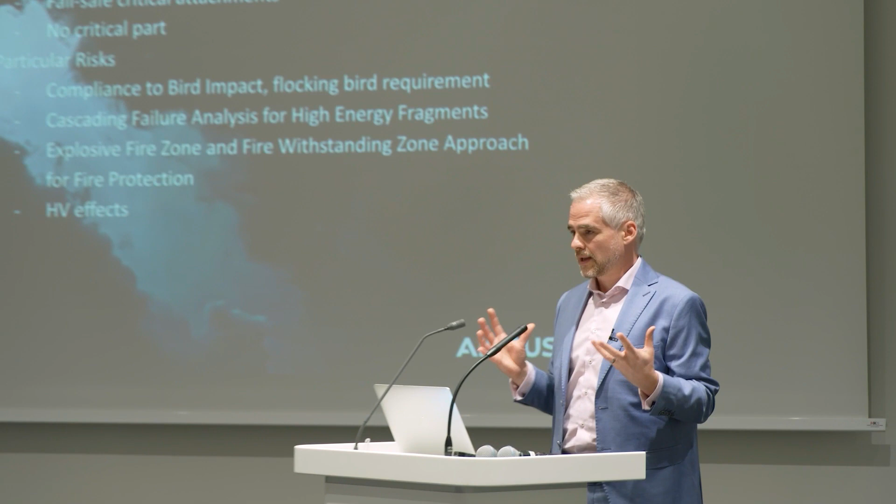High energy fragments are another very tough one. On a propeller plane you have the propellers, and the fuselage has protection if something goes wrong with them. Now we have 8 propellers in all kinds of orientations, so you cannot shield the fuselage like that. You need to find different ways of ensuring no fragments detach from the propellers and hit any critical part, the cabin, or a passenger.

You can do that again with the architecture and the different design principles applied to a blade, so that you always have a second load path and no high energy fragments develop and get projected. So that's a very important one.

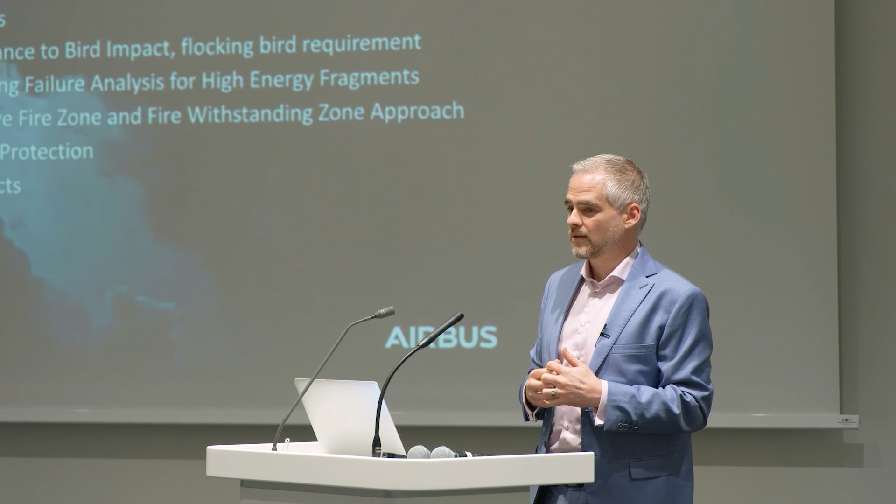Fire protection, thermal runaway of batteries, and things like that. We do not have burnable liquids on board, that's an advantage, but lithium-ion batteries are also tough to manage, as we know, especially from the aerospace industry, so there's a lot of experience on that. It's a tough one, and protecting the aircraft itself from that is a big novelty, let's say.

That's the overview of the different critical points, but a couple of further thoughts on things we're working on at the moment. If you take a commercial plane, there's a 20-minute requirement: beyond your mission you need 20 more minutes of flight time in case something happens. Our mission is only 15 minutes, so if we apply the regulation as it is now, it would just not be doable.

So that's already a challenge. How do you deal with that, or how do you adapt a requirement that has proven its worth over the years? We've seen the graphs at the beginning showing what that has led to in terms of safety. How do you take these partially old regulations, developed decades ago, and adapt them now to our case without harming the safety levels you want to achieve?

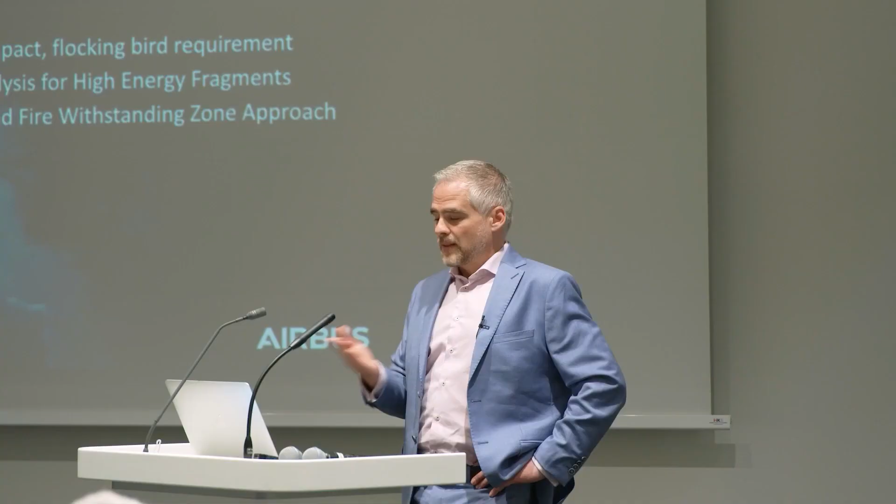Another example: if you take today's approach, you'd have almost IFR type operations. That means you have your mission fuel or mission energy, in this case electrical energy, then fuel to reach an alternate or two alternate landing spots, then a safety margin of 5% for bad weather and other conditions, and then another general safety margin. If you accumulate all these safety margins for a mission like ours, it becomes very, very difficult to have that energy on board.

These are just a couple of examples where the industry and the regulators, with support from different actors, are actually working, and where it requires really deep thinking on how to do that in the future.

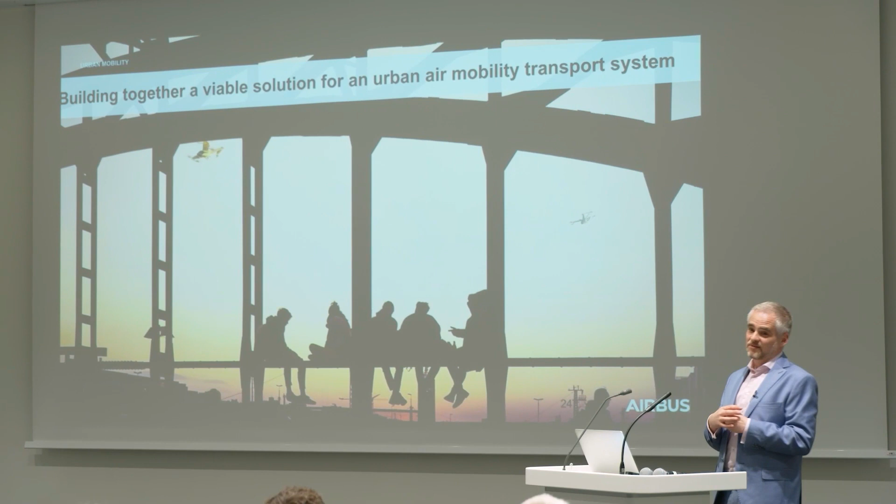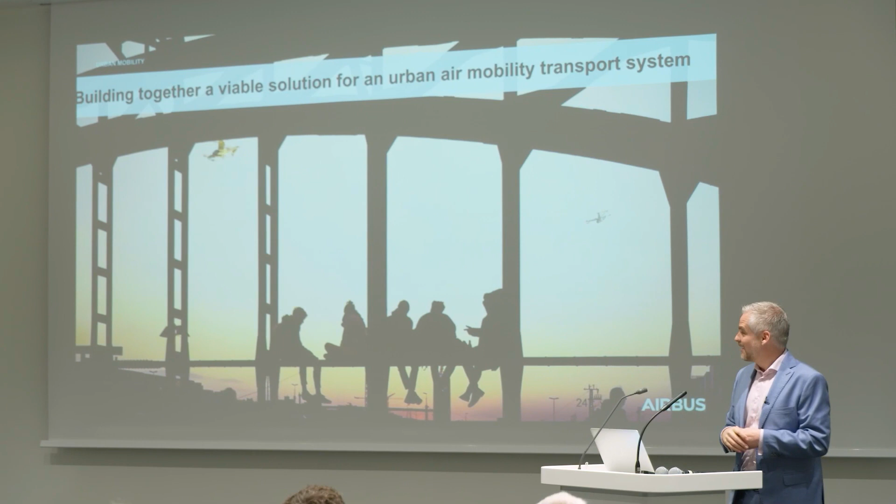And with that, I would say we'll end the talk. Many thanks for your interest. As you've seen, it's a very exciting and challenging subject, but also one with great potential, and it's great fun to work on, especially with a great team and great support. It's fantastic to work on the future of aviation, and I'm more than happy to answer questions now.